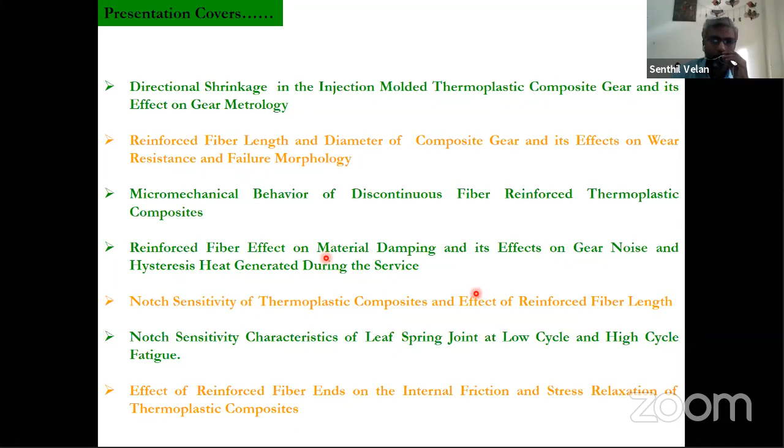The first topic is the directional shrinkage in the injection molded thermoplastic composite gear and its effect on gear metrology. We will go through this in detail in the slides. Then we'll cover reinforced fiber length and diameter of the composite and its effects, the micromechanical behavior, and the effect of fiber length on material damping and notch sensitivity of the material.

Then the leaf spring. In this presentation, I have just covered two things: one is the gear, and the other is the leaf spring. These are basically, if you remember, our major challenges, where the type of loading coming into these elements is very complex, and because of the geometry and shape, designers have more challenges when solving this type of gear or leaf spring problems. So we have just touched upon these two machine elements.

And issues like, whenever there is a discontinuity—because any machine element cannot be without some discontinuity, you may require to make joints, or you may require to make a hole—then how exactly will it behave? That is about notch sensitivity. So when there is a hole, how it will behave, and so on. These are some of the things we will discuss in detail, and you will understand more.

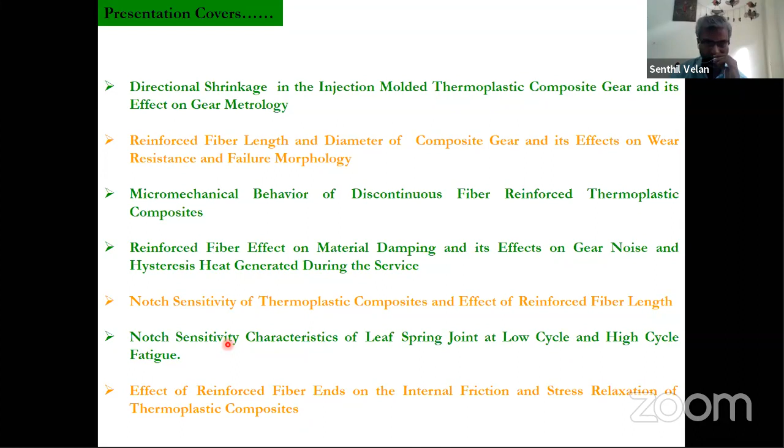The first part is the directional shrinkage in the gear. If you look at this, this is a mold, one type of mold. This is called a three pinpointed gate system. We have different types of gates—this is a pinpointed gate, and this is the cavity. This is a three plate mold system. This is a molded gear.

We have different types of gates, but say for example, let us arrive at this particular configuration or design of the gate. Then what are all the issues if you come into this? This gate location design can be done through some analytical or numerical technique, and this was done with a tool, a mold flow simulation software, a numerical technique. The whole idea is that you will be able to identify the best location.

What is the purpose? The purpose is basically that the pressure and temperature throughout the product should be similar. If you remember, we are talking about a temperature sensitive material, which is more sensitive to pressure and temperature. That means if you maintain a different pressure at a different location, you will end up getting a different shrinkage—the part size will be different at different locations. So we wanted to have uniform pressure and uniform temperature throughout.

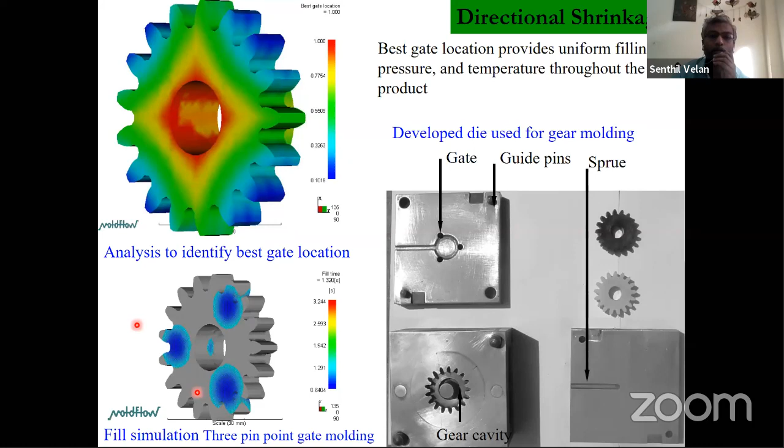So what exactly does this contribute? As we said, the part thickness and geometry is getting affected by this melt flow, including viscosity, because we know this is a viscous class of material. It is not like an elastic material, so it's viscoelastic. The heat transfer characteristics also matter, because depending on the temperature and pressure you maintain, the amount of heat you generate or dissipate will be different at different parts. So finally you end up getting a differential shrinkage.

So what is the challenge? This is about simple polymer, but when you add reinforced fibers, you can see the difference. This is unreinforced material, this is the reinforced material. This is a simulation, though I will show the actual shrinkage value also. You can see that broadly it reduces the shrinkage because what we have added is glass, which does not behave like a polymer. These are basically elastic material, so you will not have shrinkage unlike your base matrix.

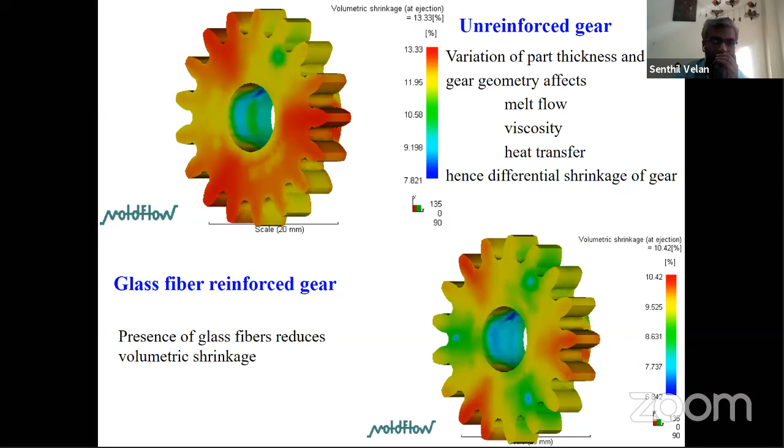If you look at that, the orientations - the fibers are discontinuous, so they are going to orient along the melt flow direction. Again, this is simulation; I'm going to show the actual picture also towards the end. If you look at that, the fibers are radially oriented - the glass fiber reduces shrinkage and fibers are oriented along the melt direction. The melt direction means this is your point of gate, and it is just flowing outward.

If you look at that, it is aligned with the ends of the profile. So that means if you measure the outside diameter or hub diameter, you are measuring in one phase along the fiber orientation, and you are measuring normal to that in another. So naturally you will understand that when you measure in this particular fashion versus this variation, you will have a big difference in shrinkage. Because if you look at the amount of material available, the amount of fiber presence here is different compared to this direction.

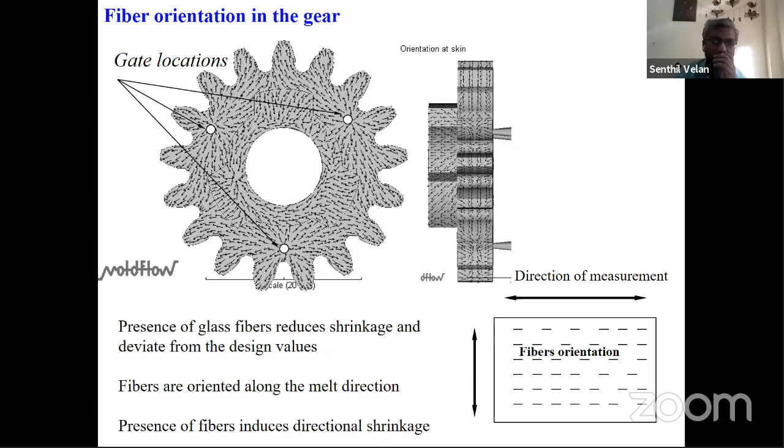This is really going to make a huge difference. This picture gives an idea about the two different things, particularly the tip circle or hub diameter. This is your hub portion, this is your tip circle diameter, where the fiber orientations are coinciding, whereas normal to the fiber orientation is nothing but your face width direction.

In addition, the bore diameter pin is going to prevent the shrinkage - this is internal core like material. So typically if you look into this, you will see the actual measurement versus the predicted one. The actual measurement, if you look at the hub diameter, for example, and face width, you will be able to see the difference.

So this is for one class of material, unreinforced material. The deviation is very large here, whereas the face width deviation is very very less. But when you add the fiber, it's exactly the same behavior but slightly lower - the deviation from the actual measurement is slightly reduced because of the presence of the fiber. Even without fiber, the polymer molecule orientation affects the geometry across different parts. But we know the hub face width is not very crucial - rather we will concentrate more on the gear tooth profile, which we will look into in the following slide.

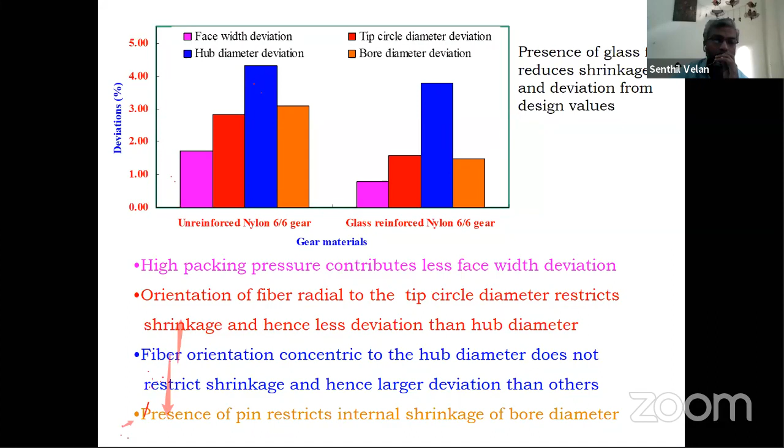This is not only due to the minimum thickness and issues. The warpage, we are all familiar with this warpage in casting. It is similar to that, but as far as injection molding is concerned, this is more related to the shrinkage deviation, when the shrinkage is not uniform, and this contributes.

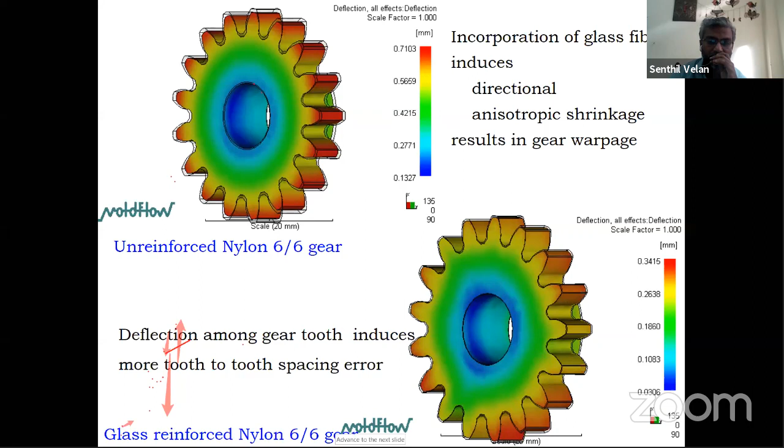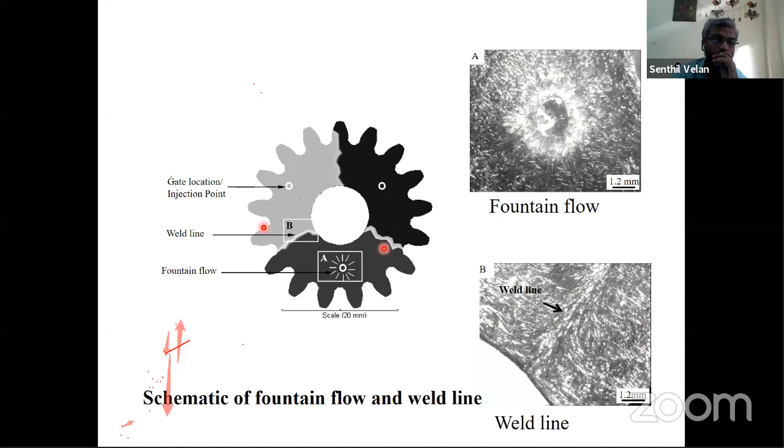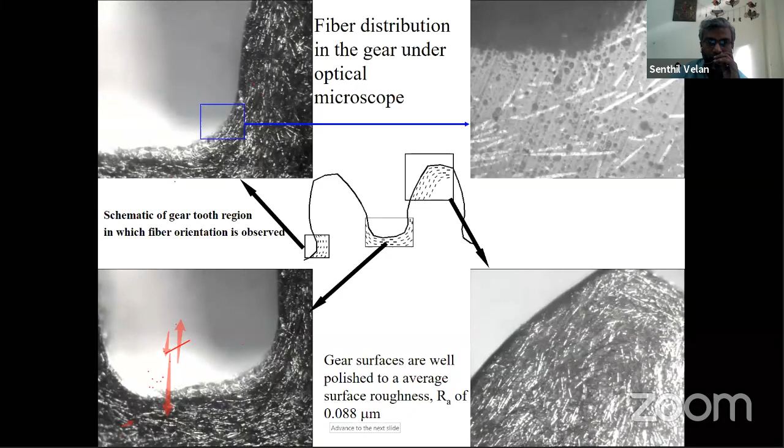More than that, what is more important is the final metrological aspects, and how this orientation is going to really contribute. This is one particular type of thing called gear tooth profile. And the gear tooth profile itself has many things: pitch deviation, profile, form deviation, and so on.

Here you can see we took three teeth at three different numbers - 1, 6, and 12 - and we moved from the base circle to the tip circle. Ideally it should be a straight line. It is an involute, but the variation we are trying to observe is basically the variation of the involute form deviation. Ideally it should be a straight line, but you can see how exactly it turns out.

This is unreinforced one, this is reinforced one, and you will be able to see that in the case of glass reinforced material, there is less amount of shrinkage, because ideally you expect a straight line. This is achieved here, but the problem is this is the total.

You will be able to get two different things: one is called total profile, as well as form deviation. Form deviation is nothing but you have some mean line, and within the mean line you have some variation. But here, within the mean line, you don't have much form deviation. So in unreinforced material, the form deviation is not so much, but the total deviation is larger.

So typically when you design the gear, it depends on what type of deviation you can tolerate; accordingly we must be able to see that. Not only that, we have other types of metrological deviation which are also to be considered carefully.

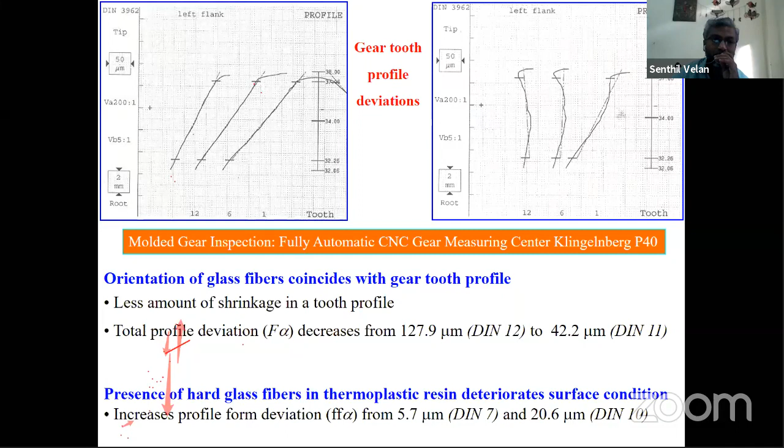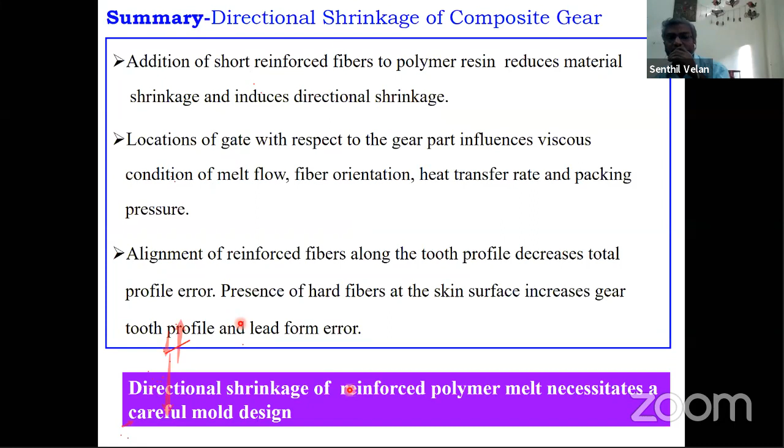In the next topic, we have just covered one topic — we have to be careful about the directional shrinkage. Now we will discuss more about the fatigue and friction wear behavior of these developed gears.

This was a test facility used to conduct some experiments, and I will not go into detail. This is just a drive motor, and this is a driven system, a dynamometer-like setup. These are some of the sensors used to measure torque, temperature, acceleration, noise, and such things. We will not go into the detail.

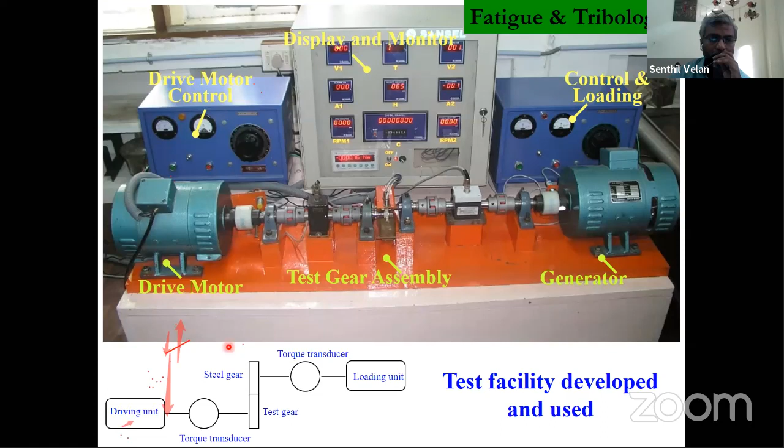If you look into this, these are some fractured surfaces. Again, we have used a different class of material, but I am only going to cover what is required. Broadly, we have used three classes of material in this topic: glass reinforced and carbon reinforced. Within the glass reinforced, we have nylon 6 and nylon 6,6. We have used these for different objectives, but finally we end up getting different sorts of results. If you look into this fractured surface, there is not much fiber getting separated.

Pullouts are not much happening, though you are able to see some fiber extruded and all. Not much pullout, not much hole you are able to see. Sufficiently, the fiber and matrix are in bond with each other. Good adhesion - this is separated fiber. Good adhesion is happening, so naturally you will see better wear performance, resistance, and so on.

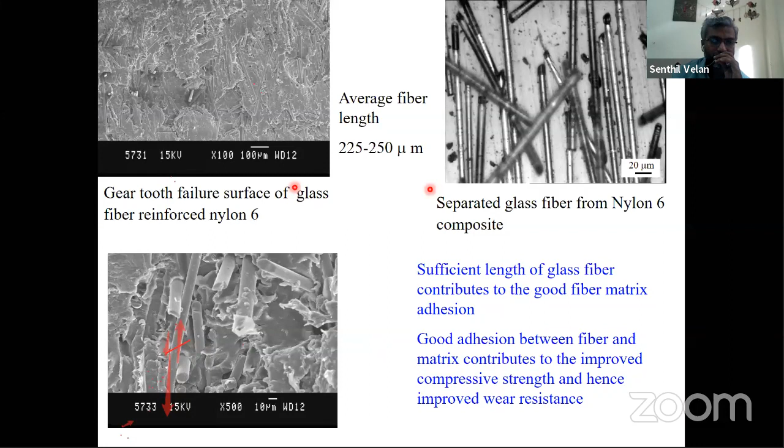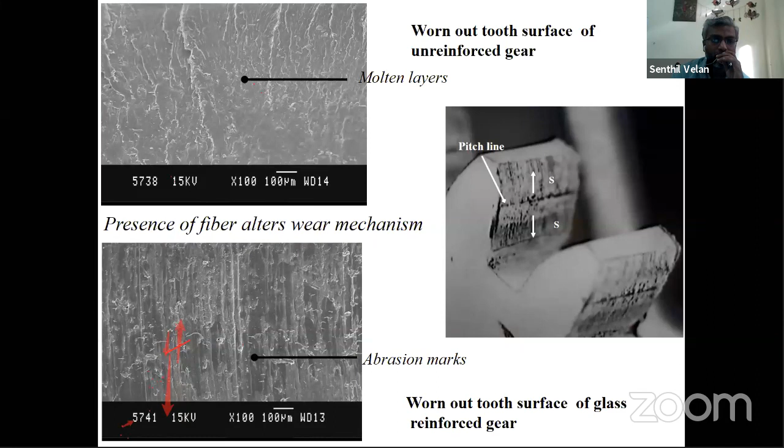But in the typical worn out surface also, you will see how the wear marks are observed from the pitch surface and so on. What is surprising, if you look into this to compare the wear particles between the glass reinforced and unreinforced material, you can see a big difference between the glass reinforced and these two unreinforced materials. So at higher loads, basically at higher contact stress, because we are all familiar with the Hertzian stress.

Contact stress related - particularly the gear is subjected to both bending and contact stress. So we have to bother about both bending strength and contact strength. Naturally, if you want to prevent wear, or rather if you want a better tribological property, you need to work more on contact. If you are really bothered about the bending thing, you have to bother about the root stress and so on.

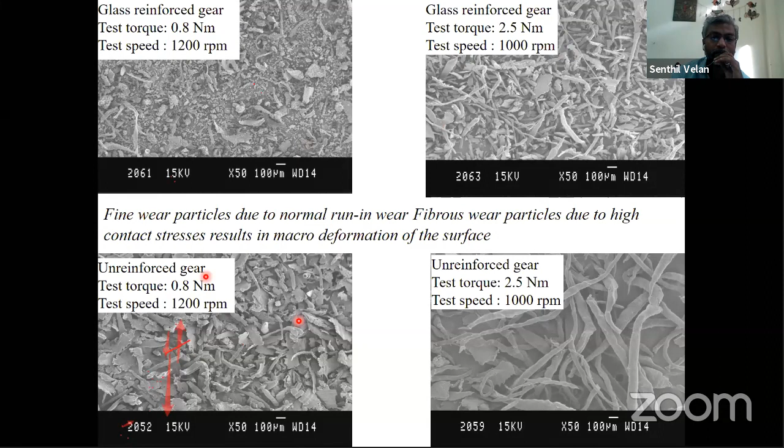And regarding the bending aspects, again there was a lot of other work done, like the effect of speed. We normally see that in the case of metal gear, the speed does not make any difference - we never bothered about the effect of speed and all, except the PV criteria, we don't really give much importance. But the gear, being a viscoelastic material, we need to work more on that. I have not covered this particular aspect.

I am just giving one small fact before we move on further. Normally we expect that when you run it at higher speed, the wear will be more, but it happens opposite in the case of polymer class of material. That means if you run it at higher speed, it will perform better, because the contact time will be relatively less. And when the contact time - the rate at which you move or slide - is faster, the material will behave in a better way.

Because its strain related issues are also there, and contact time - these two contribute. So when you look into the bending behavior, as we said, both bending and contact - this is about the bending one. As expected, the fibers will act as a bridge between the cracked fibers, and whether it is unreinforced or glass reinforced or carbon reinforced, you will always see that this is going to restrict our crack growth and so on. So it is always going to be helpful. There is not much issue over there.

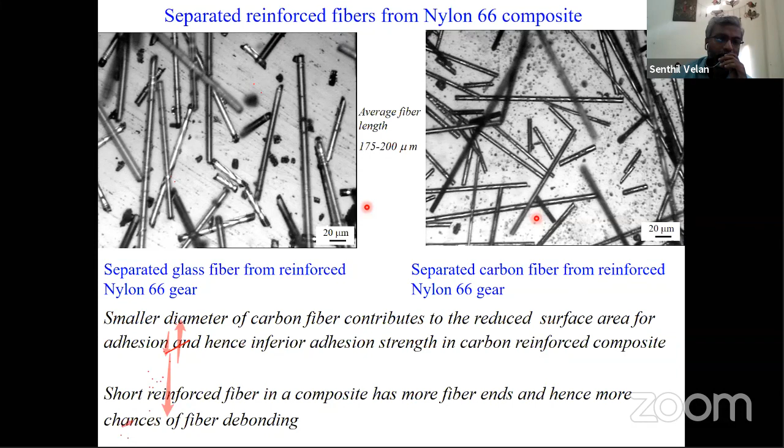So this is what is finally reflected. If you look into this, this is about another class of material where we have used a 6-6 material. Again, we expected the 6-6 material will be better than 6 material, because this is a different polymerization. It is expected that nylon 6-6 will always be better than nylon 6 material.

But surprisingly, when we make use of a different glass material, you can see more pull out. You can see a large amount of holes over here. So it is not because of the 6-6 and all. In fact, 6-6 is better than 6 material, but this one has got a reduced fiber length, and that is going to contribute to these issues.

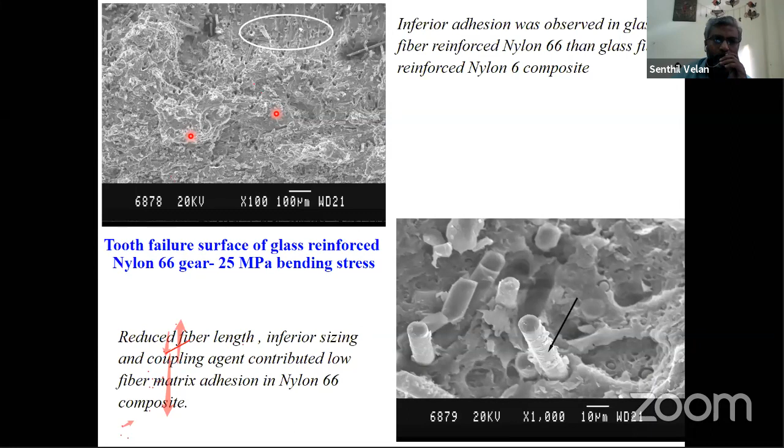And carbon, this is about carbon. You can see that huge pull out. You can see a large amount of black holes and so on. You can also see the pull outs over here.

Typically, the surface energy of a typical carbon fiber, though it was not measured, the surface energy is the one which decides the wetting capability and how far you are able to join this material with another matrix. Though individually it is a better class of material, unless you take care to improve the surface energy and the issues about diameter and length, you will end up getting a poor material. In fact, that is what happened — it showed a very poor performance.

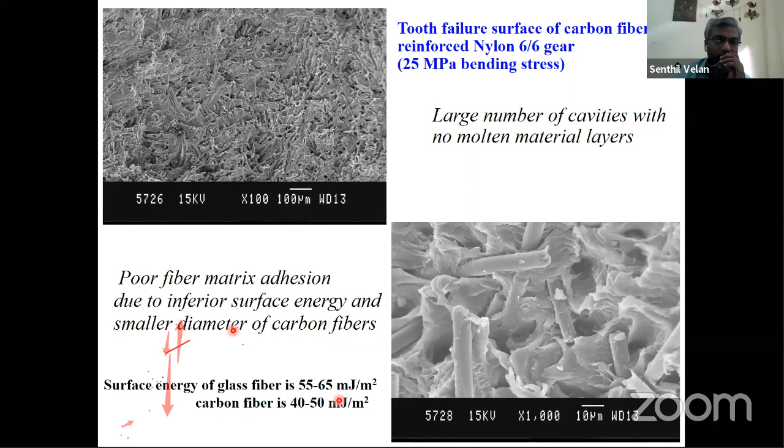So if you look at that, this also gives an idea about the wear particles. You must have seen the debris particle in the earlier slides for 6 material, whereas for the 6-6 material, you can see that the debris are larger in size — both in carbon and the 6-6 glass reinforced material. Even at lower load contact condition, you can see that wear debris particle, meaning you have to even limit your contact load a little earlier than that.

So yes, it was showing the carbon reinforced gears were having a better bending static strength. Though I have not presented that slide, as far as the contact condition is concerned, it was showing no bad one — it showed no crack, and it takes more time to develop, to form, and to grow. That is sure, but it is a contact part. If you look into this, the surface is getting worn out very quickly and so on.

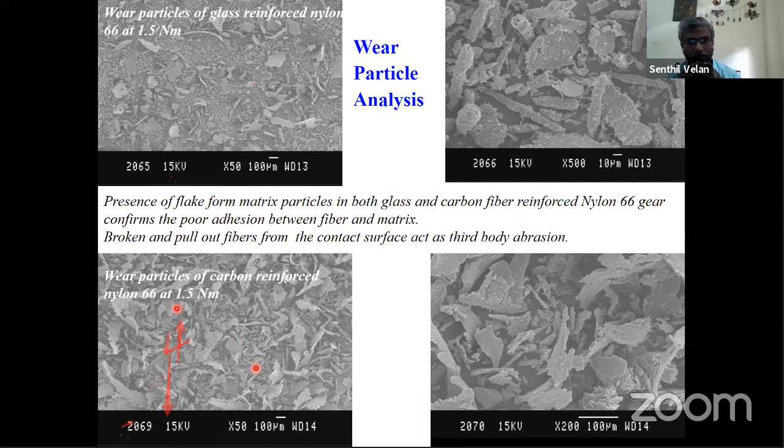This is the summary where we wanted to present. So in tribology and fatigue, it is not just by adding some reinforced material that you will end up getting a better product. It is not so — we have to be more and more careful, particularly for tribology applications. Then we have to bother about the surface energy, the fiber diameter, fiber length, and number of ends.

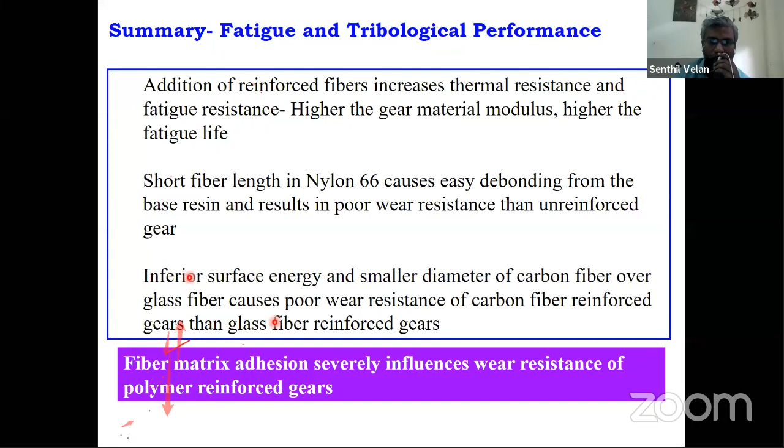Everything matters, so this is what we have to be careful about in choosing the appropriate material for our application. In the next few slides, I will again touch on the same point but with some other supports. We have done some analytical and numerical work to understand the effect of fiber ends and fiber surface. Typically, a unit cell was modeled, and then we tried to see how this micromechanical model is getting affected regarding stress transfer between those things.

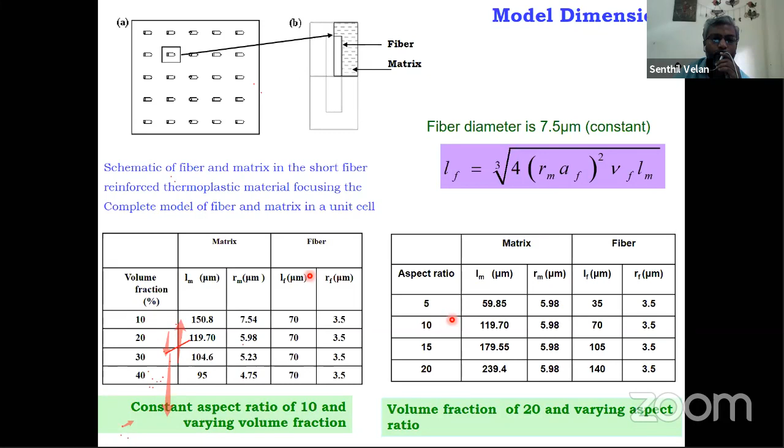This is not in the paper — this is just some numerical work we have done to prove that at various volume fractions with different length and diameter, maintaining different ratios, we were trying to understand what is the critical fiber and critical fiber length. That was our objective. If you look into this, different conditions were taken, and we were trying to understand how the interface is going to affect things.

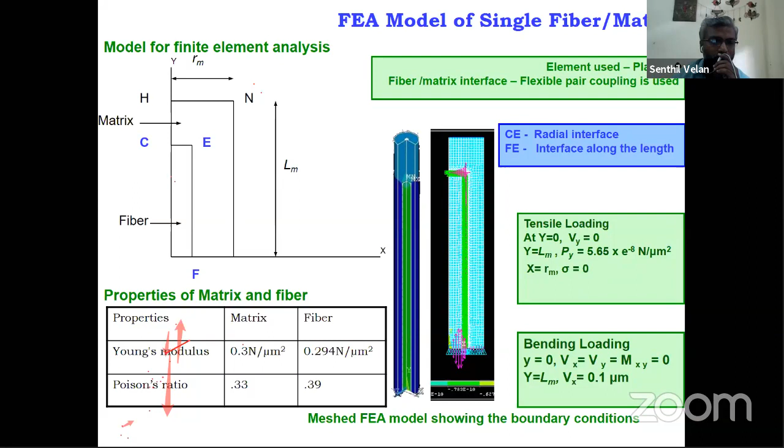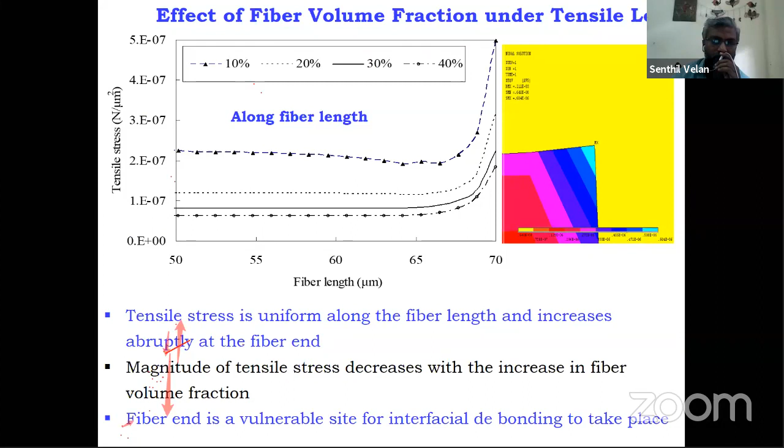So there you can see at the fiber end, the huge transfer of load happening over there, whether it is a tensile load, a bending load, or whatever type of load. If you look into this, you have to really bother about this critical length. Beyond a particular critical length, it is not going to make any difference.

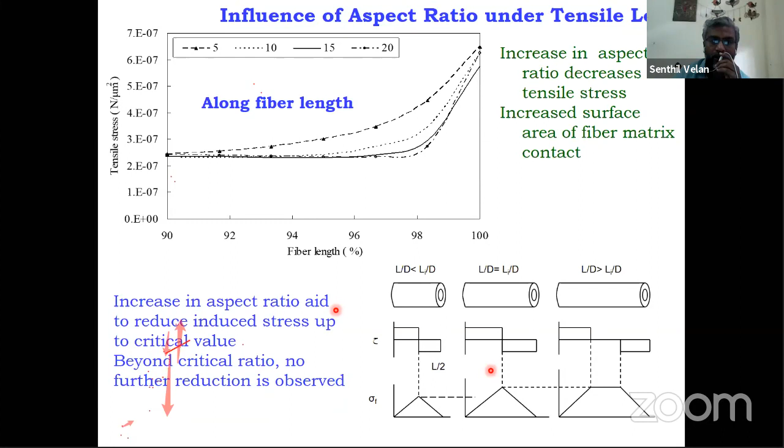But you have to choose your appropriate material, so that you make use of material where a critical length and critical diameter is considered. For that purpose only we have kept this slide. And not only that, the fiber fillet radius is also going to make a huge difference.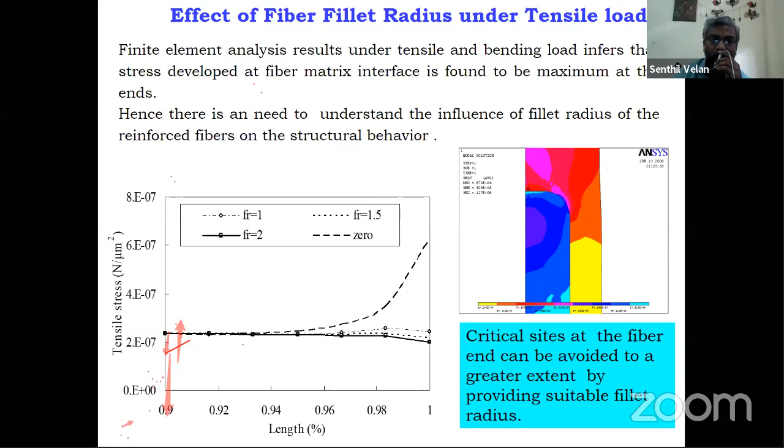So how can this be done? Whether people manufacture with a single material, or add the material, this is done through processes like extrusion, pultrusion, and so on, as I said in the very first slide. That is going to decide the type of end you have. So always, as expected, sharp edges are not at all preferable. Analytically or numerically also you can prove how this is going to affect our ends and so on.

This was the slide where we identified how this interface is very crucial for us. So when we wanted to design some elements, it can be a gear or any class of material, we have to give more importance to the type of fiber. It is not just glass or carbon or Kevlar. We have to give more importance to even the size of the fiber, and the aspect ratio, the fiber ends. If the fiber length is shorter, you will have more fiber ends, and we have some slide that shows how that is going to affect the other performance as well.

So with this, we move on to the other topic, which is the damping aspects. Many of these machine elements, basically we want to have a quite noiseless operation, and that is decided by this damping property. So it should absorb the noise, shocks and vibration, everything.

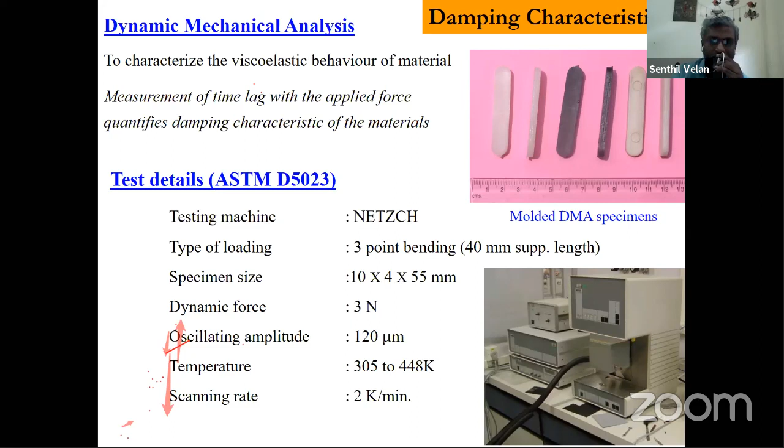This is a typical standard technique called dynamic mechanical analysis, specifically meant for this viscous class of material where you have viscoelastic issues. This is done based on standard testing. So unlike our normal class of elastic modulus, we will bother about the storage modulus, loss modulus, and then the damping ratio.

We expect that higher the damping factor, or damping ratio, the material is good for your damping application, like in the gear and leaf spring. People expect that it should absorb the shocks and vibration. So though you add glass and carbon for your fatigue and tribological aspects, it comes at the cost of your damping. It's very obvious, when you add the elastic material, the damping property, that is the ability to absorb shocks and vibration and noise, is getting disturbed.

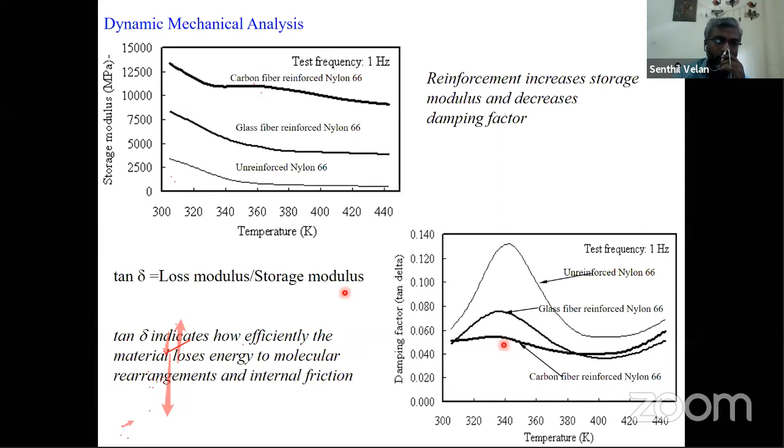Noise is getting more not just because of the material, it will also come with metrological aspects. The tooth spacing error we discussed earlier is also getting altered or deteriorated, and that will also create more noise. So this is about noise generation.

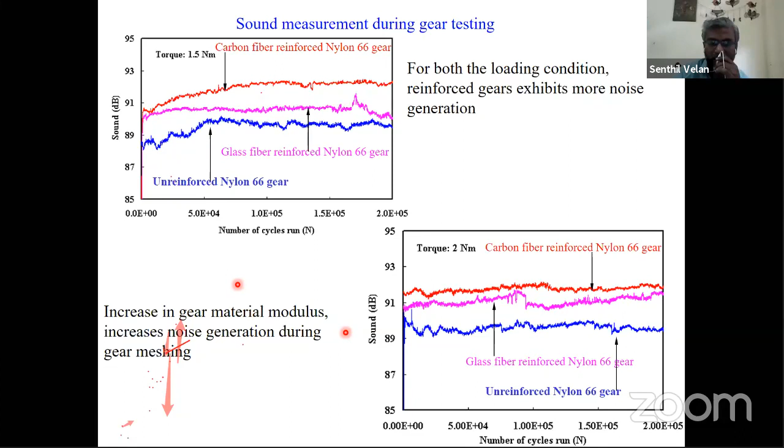To understand more about hysteresis, we are all familiar with material hysteresis. That means you do this loading and unloading and try to see whether the material follows the same path. If it takes a different path, then you say this is hysteresis, and some amount of energy is getting lost through that. So a test rig was developed in-house, and we tried to see how hysteresis is occurring under the gear.

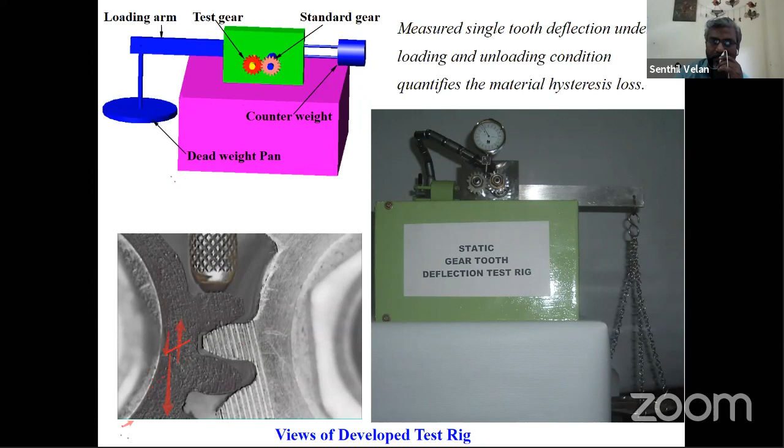This indirectly gives the amount of heat generation due to material hysteresis, because you are subjecting this material to fatigue load, cyclic load. So because of the cyclic load, you end up getting heat generation. Naturally, when there is internal heat generation, it's because of molecular collision, particularly the polymer molecule and polymer with fiber material colliding with each other, and that generates internal heat. Being a polymer, a heat sensitive material, this is going to soften the material and weaken it mechanically.

So we have to concentrate on maintaining this hysteresis under well controlled conditions. For that purpose, we have done this particular exercise.

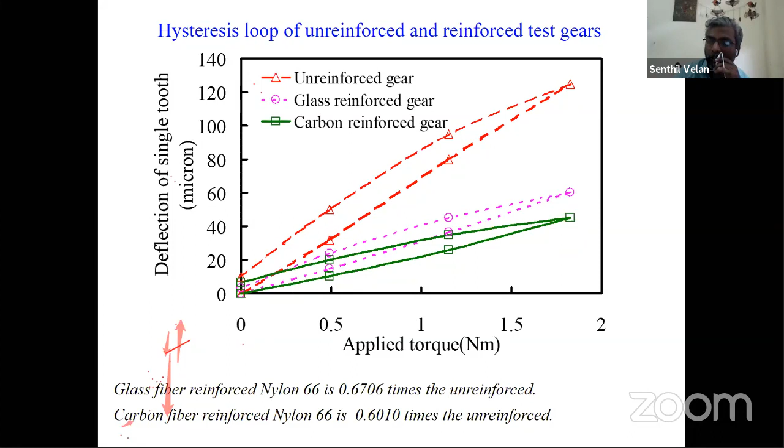When you add the fiber, naturally this loop size gets smaller and smaller. You will be able to see that in that way, the internal heat generation will not be more when you add the fiber. In that particular aspect, this is better.

Another aspect is the metrology, because the noise is not only because of the material aspect, but also the geometrical aspects. The error, the worst pitch error, which contributes to the noise, is basically the worst error between gear teeth - like between 1 and 2, 1 and 3, 1 and 4. There are cumulative pitch errors, and again you identify the worst pitch error out of this.

What is the worst pitch error? There, if you look at that, the reinforced one has a higher error when compared to the unreinforced one. So it is not only the material aspect, but geometrically also it is poorer, and because of that you will end up getting a larger dynamic load and so on.

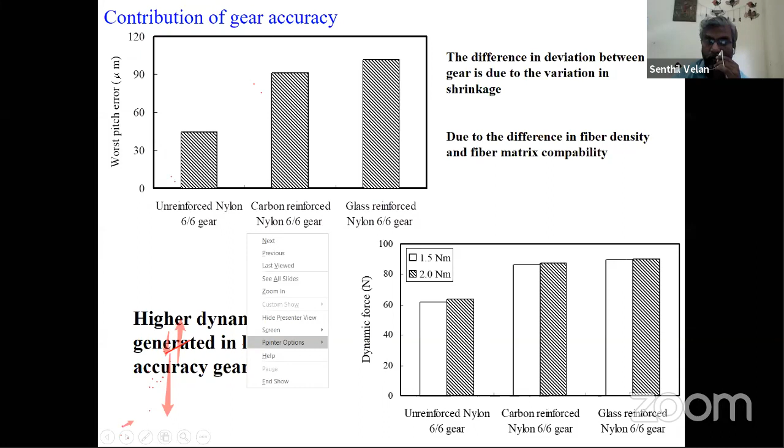These are theoretically calculated, not exactly measured, but these are the measured ones - the pitch error and all is basically measured, whereas these were theoretically computed and so on.

So in the damping, we wanted to give some sort of summary. When you add the reinforcement, naturally it will increase the modulus, particularly the storage modulus, thereby the damping factor is reducing. Damping factor reduces and gear accuracy induces more noise generation, and addition of reinforcement decreases the amount of hysteresis and hence its surface temperature. So damping characteristics influence the gear performance.

So any machine element is subjected to contact and so on, so the ability to absorb shocks, vibration, and noise is also very crucial. In a way, we were all thinking that when you use a polymer class of material, it will be better, but when you add the fiber, it gets more complicated. That is what we need to understand from this.

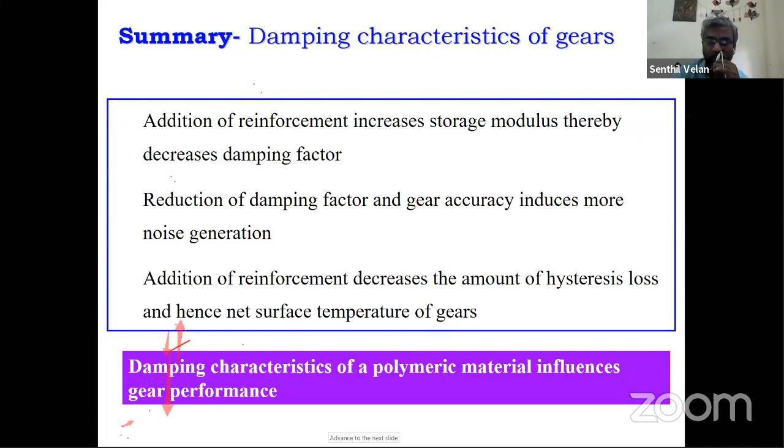The next topic I wanted to cover is about damage, which is the fracture mechanics aspect. Again, we started with some simple specimen level understanding, then we moved on to the part, particularly the leaf spring application. This was a standard tensile specimen with different diameter holes, and then we did some tensile tests.

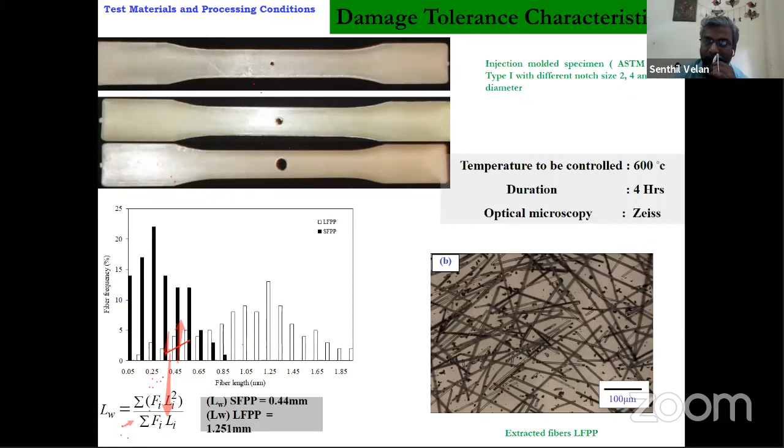We took two classes of material - one is short fiber and the other is long fiber - under three classes of material. In the very first slide, I gave examples of short fiber and long fiber. The fibers are random within the short fiber, whereas the fibers are well aligned in the case of long fiber. So in those cases, you will be able to see what is really happening to the notched and unnotched specimens. We are trying to understand notch sensitivity, so what you do is perform tensile and other basic tests with a hole and without a hole.

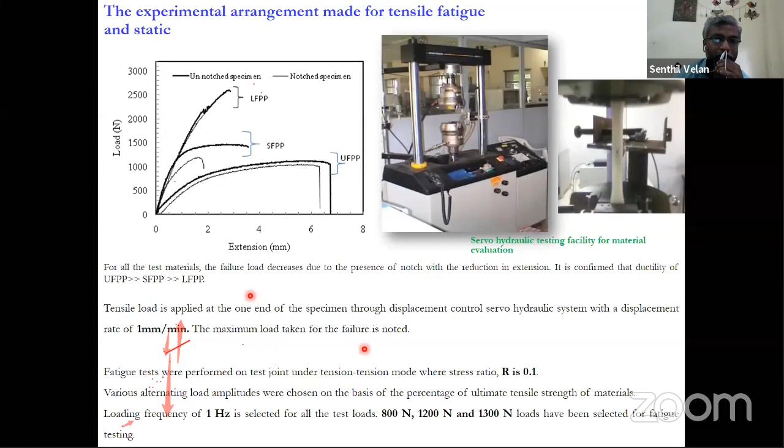It's not just about the load coming in, because without the hole you'd have to reduce the diameter in that cross-sectional area, and then try to understand the strengthening or weakening effect. So we have also done some fatigue load testing. You will be able to see the fracture strength - if you look into this, under this class of material, which is a long fiber one, you will see a drop.

Whereas both the unreinforced and short fiber material - here we used a different class of material, polypropylene. In earlier studies we used polyamide, a nylon-based material. So here, when the notch diameter is increased from 2 to 4 to 6, you can see there is an increase. It doesn't mean your strength is getting increased. As mentioned, you have to subtract the diameter of the hole - the net strength - and whatever area is available for resistance, only that you consider. So with that, you'll see a slight increase. This we call the strengthening aspect, and this is the weakening aspect. This is how we try to understand notch sensitivity - the net area is considered for strength capability by subtracting the notch area. So we need to really consider this notch sensitivity.

That means when there is discontinuity, like a hole in your material, it doesn't always deteriorate performance - sometimes it will help. This happens when the material has sufficient viscous component. When the viscous component is relatively less, it's not going to help. If you look at this long fiber reinforced one, it deteriorates with a larger diameter, whereas this one shows improvement.

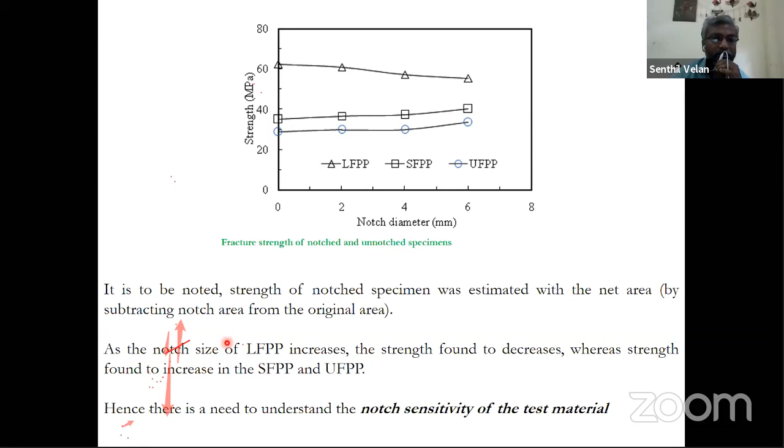The fatigue aspect - we're all familiar with notch sensitivity, Kf, Kt. You can clearly see these two are dropping. This notch sensitivity in the unreinforced and short fiber cases is dropping down, whereas this one is increasing. We call this a strengthening effect. Why does strengthening happen? Because this material has the ability to undergo localized yielding near the hole, whereas that possibility doesn't happen in the case of brittle or high strength class materials.

So this was done even at the specimen level - you can see near the hole, near the notch, what is really happening to the fibers. You can observe the fiber bending issues, the notching issues.

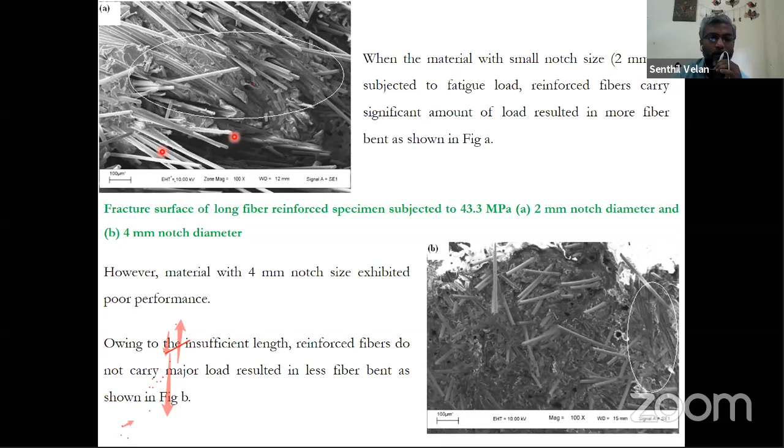Now we wanted to understand how this gets reflected in the machine element part. Particularly we took a class of leaf spring - this is another work where it's a mono leaf spring. We're familiar with the graduated leaf spring with many smaller leaves of shorter length than the master leaf spring. But this is a single one, and you want similar performance - you can see the middle has a larger width, the way in our graduated leaf spring we put a smaller one, then keep increasing, so as to have normalized bending stress with different lengths of leaves - longer, shorter, and so on - so the middle takes more load to have normalized bending stress. The same thing is kept here with a larger width in the middle. This single leaf spring achieves similar performance to what people achieve with the graduated leaf spring. We won't go into detail on other aspects like gating location.

Again we took two different classes of material - unreinforced and glass reinforced polypropylene. We will concentrate on the notch aspect. Finally, these fibers - this leaf spring is to be joined with your machine structure, like your chassis and such things.

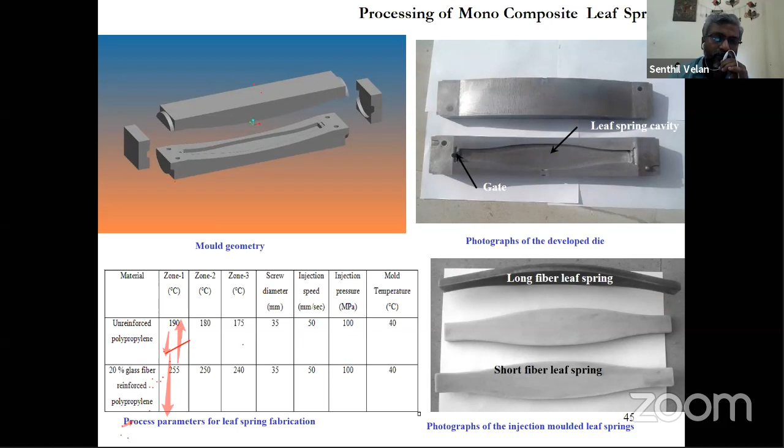So how are we going to join? Again, by making holes, fasteners and all. In those cases, you have to make a hole. So now the issue is, when you make the hole, how is it behaving? Because your leaf spring is not just based on that - the joint behavior is also something we have to consider. That is why we said how notch sensitivity, particularly with reinforced material, is going to affect it. That is why we saw the specimen, the behavior and all. This is how typically people carried out this joint strength behavior testing.

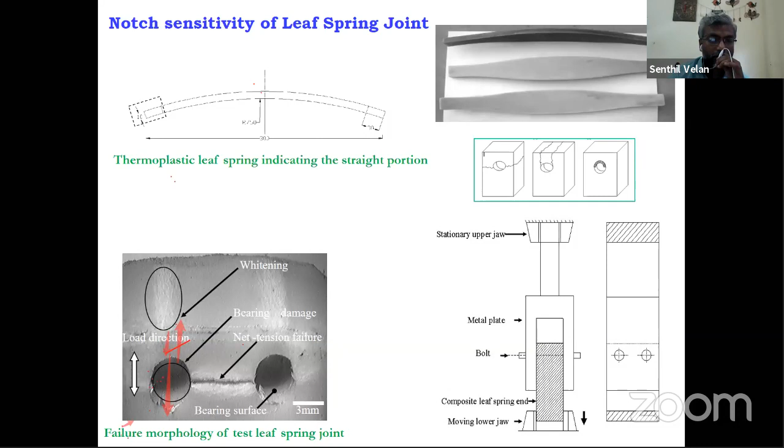If you look into this, different diameters of holes were tested, and different types of fatigue loads were given. We observed different types of failure between this and here - bearing failure, shear failure, and all those failures under different loading conditions.

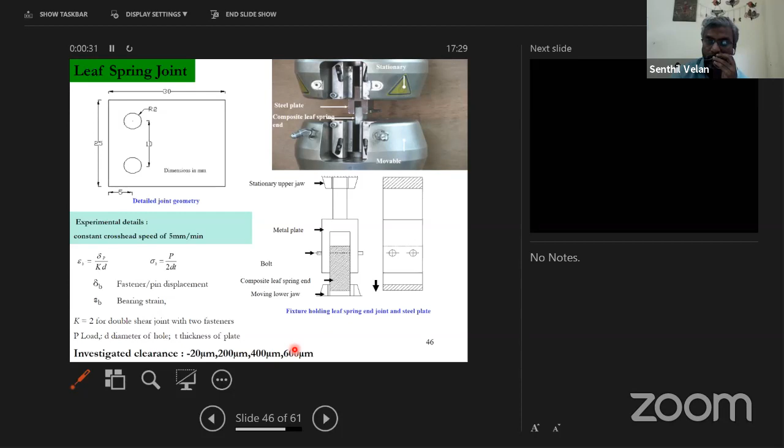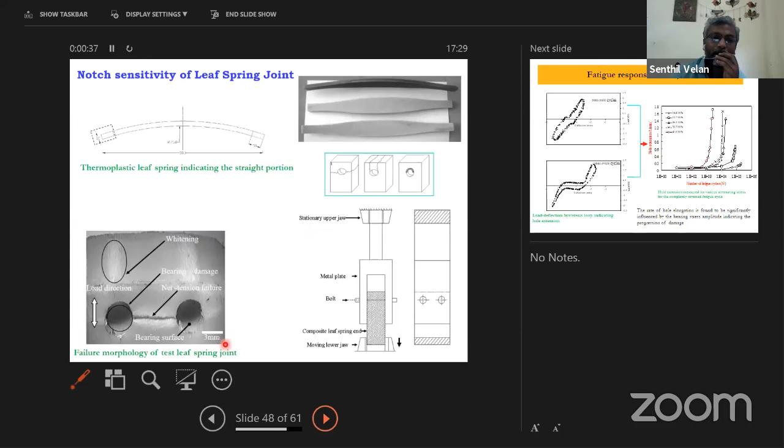So this is what we have done for various diameters of the holes. We have also considered the clearances, because what type of clearances you are giving, in microns, between the pin and the hole - that is also going to make a huge difference in the fatigue behavior. That was our objective. We have shown how the loop is getting enlarged, and also we were able to see at different clearances how that is getting affected.

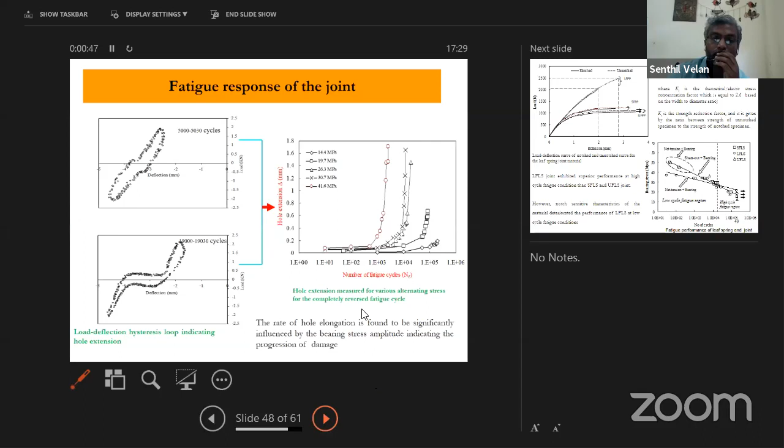So this was the slide we were trying to finally achieve. If you look at that, the notch sensitivity, because of the different - we have considered three classes of material, and how the notch sensitivity is getting varied. We were trying to understand this from this exercise.

In this particular portion, you will be able to see this is the final bearing strength, between low cycle and high cycle - we are familiar with low cycle and high cycle fatigue. Any machine element subjected to fatigue requires a different criteria or design approach or strategy, because this behavior will be completely different under 10 power 4 and beyond 10 power 4. So the similar thing we were able to see here under low cycle fatigue behavior.

This long fiber reinforced material shows superior performance in the high cycle case, whereas in the low cycle case the unreinforced material and short fiber material show even better performance. Again, it all depends on the notch sensitivity and localized plastic yielding. That was the reason we have seen at our specimen level itself - why this particular behavior we have seen at the specimen level. Now the same thing we are confirming at the component level or the machine element level.

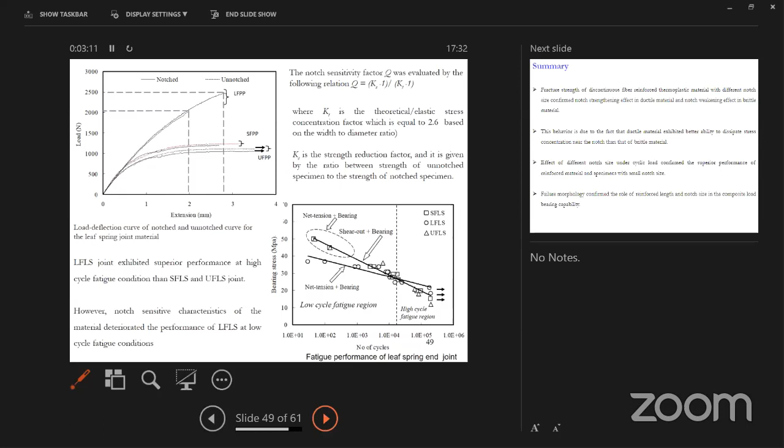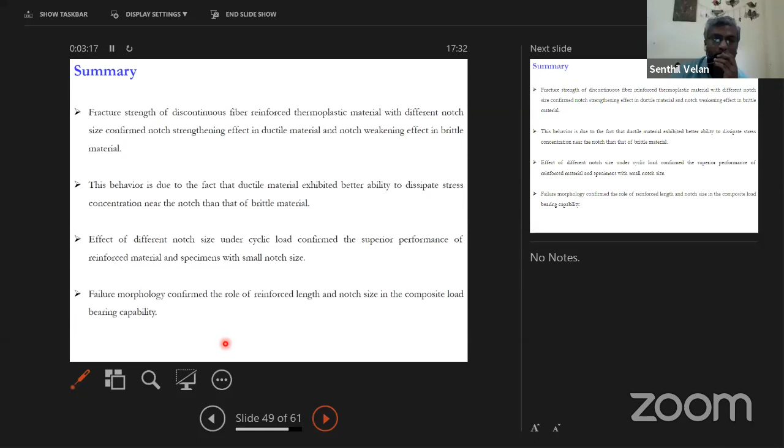So this was a summary - we have to really be bothered about the fracture strength of this type of material, because it is not that you will always have a continuous material. You will always have some discontinuity. So the fracture mechanics aspect is really to be looked into. Particularly, we have considered only one particular aspect, the notch sensitivity. There are many other aspects.

Depends on the component and types of load. You will really be bothered about different loading conditions, which is what we have simply bothered about, the notch issues and how that is to be taken care of or seen. That is what we wanted to conclude with this.

This slide will give more insight about the fiber end issue. If you remember, we said it is not just that a short fiber is inferior because of the length, you will have more fiber ends. So to prove that, we took specimen level experimental study. If you look at those two pictures, you will see this is short and this is long. For the same amount of volume fraction, you will have more fiber ends because this is short fiber. That is going to contribute to the damping as well as the heating issues, the dissipation. That is what we wanted to confirm.

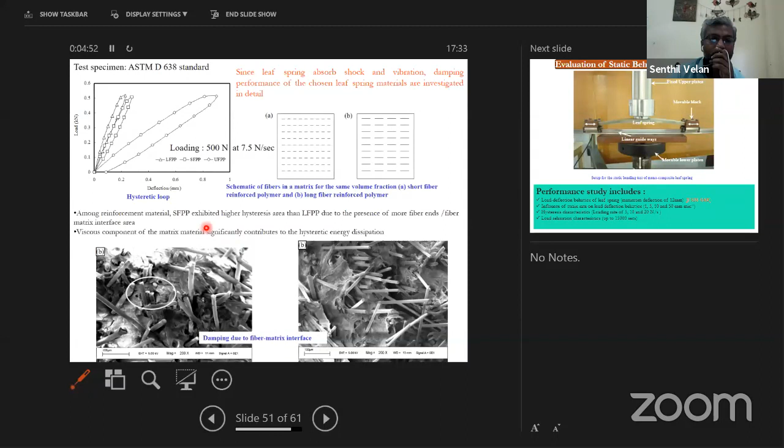So this will have higher hysteresis area. So again, we did this hysteresis experimentally. When compared to the long fiber one, the short fiber one will have higher hysteresis because you have more fiber ends and so on.

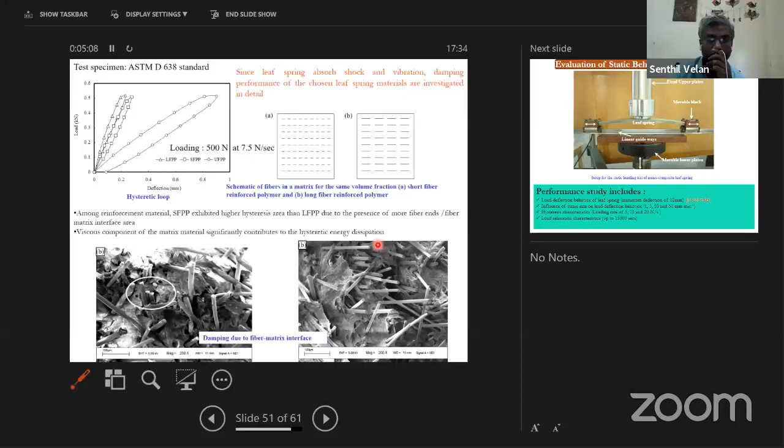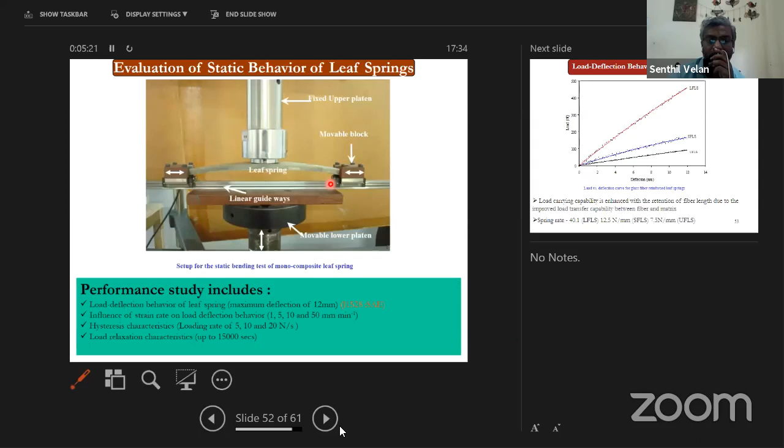This was the one I mentioned, where we made a specific test rig where a simple compression load is going to contribute the bending one. These are some testing conditions. This is a simple load carrying deflection behavior, and these are the loading and unloading behavior, and this is a hysteresis. The one we saw earlier was specimen level; this is the component level, particularly the leaf spring, where we were trying to get the hysteresis issues.

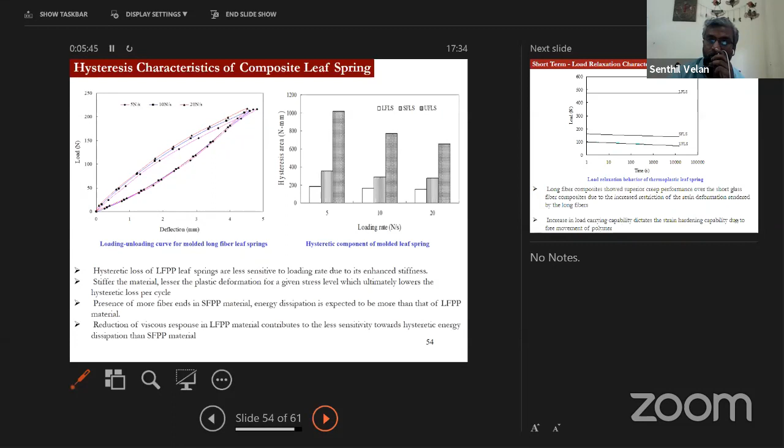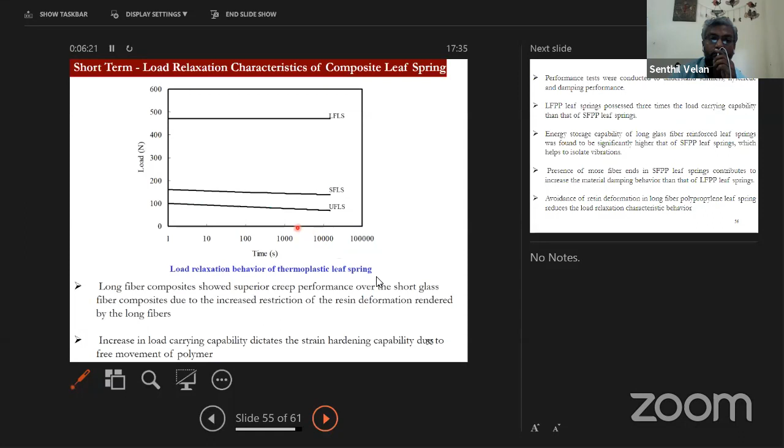Comfortable? Yes, yes. Taking time for the slide change.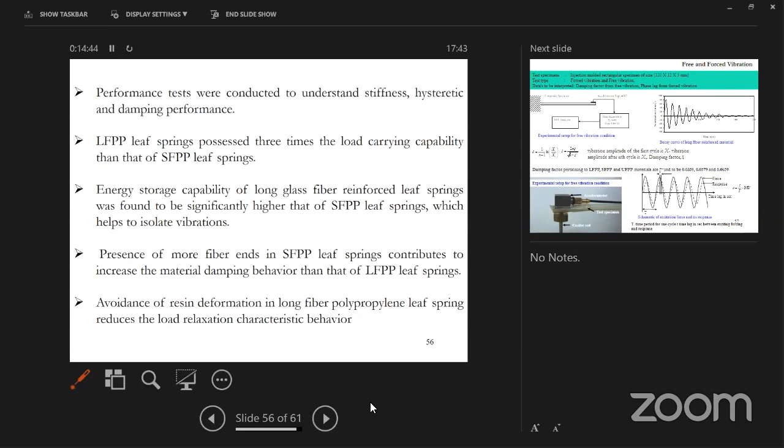Fine, I think you can continue your session. Yes sir, fine. So this was the thing which we were covering up, and then we will move on further.

We wanted to consider the damping aspects in this particular thing. We got some experimental results from the forced and free vibration of this class of material, showing how the response will help us in understanding the damping behavior.

So there were some accelerometers, some exciters, and we were able to pick up the acceleration, and then we were able to see the decay pattern and get the response between the lag between this load and displacement. That will also give an idea about the material's dynamic characteristics for this class of material.

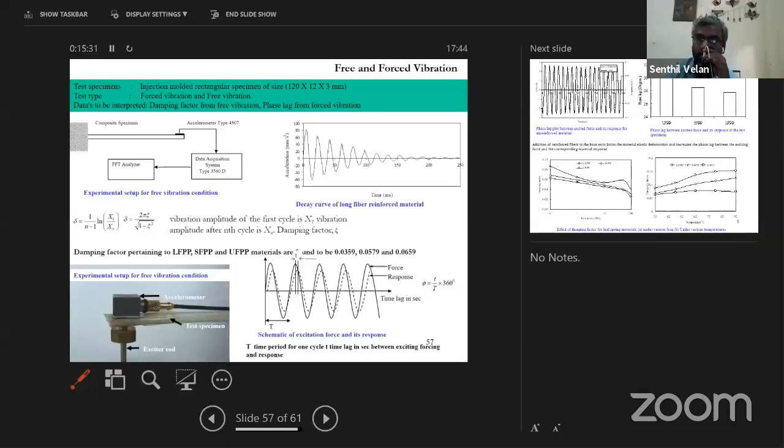So there is always a phase lag between this force and response, particularly for a material like polymer, where the viscous component will always cause some delay. In fact, though I have not presented this in this particular work, there will be a delay when you mate a polymer with a steel gear, because steel is an elastic material, and polymer is viscoelastic. So if you rotate the steel gear by 2 degrees, the polymer will not rotate by 2 degrees. It will rotate only 1 degree 30 minutes or something. This is called rotational delay, and this rotational delay will cause operational interference and so on.

But what we are talking about here is the phase lag. That is, there will be a lag between the force and the response. You will not immediately get the response, so there will be a lag. How that is going to affect things is what we have listed over here.

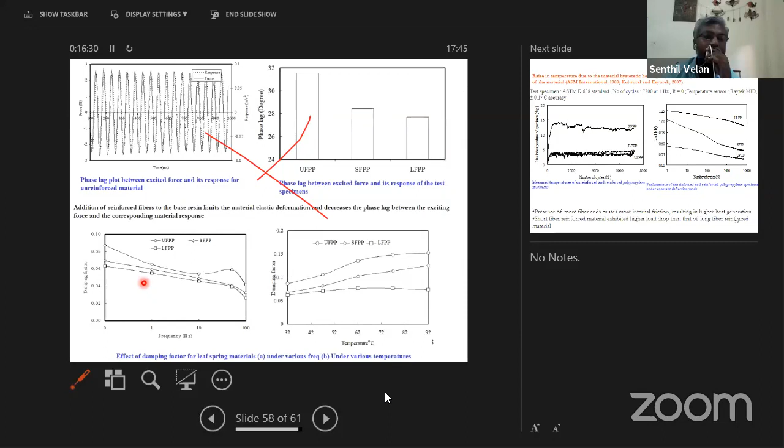I think we are towards the end. So basically, when you design a material for a damping application, particularly leaf spring, we want to absorb shocks and vibration. The whole functional aspect is basically to absorb shocks and vibration, the strain energy, and all. We need to really think that just by having some reinforced material, you will not necessarily end up getting better fatigue strength. We should not conclude that, because we are basically altering the dynamic mechanical characterization, and we have to remember those aspects.

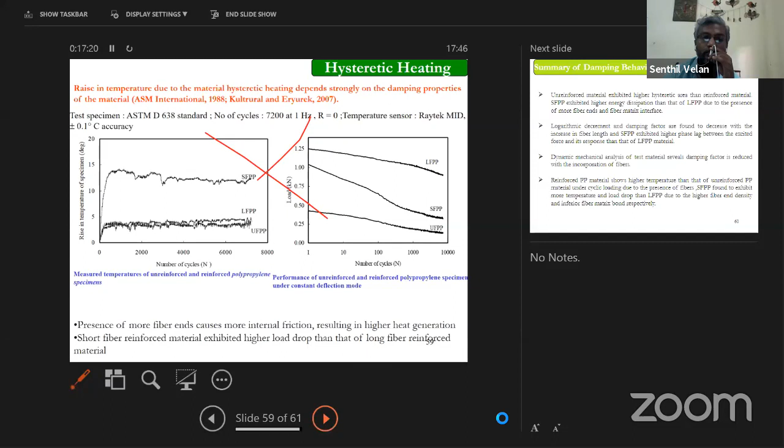Senthil sir, yes, yes, finish now sir. Yes, we are towards the end. I think we have only 2 more slides.

We have shown analytically, with some FEA results also, that a fiber sharp edge means it is always, as a mechanical engineer, we know the stress concentration issues. It will be more weak, more weaker in that particular region if it is a sharp edge. So we don't want a sharp edge, we want a rounded sort of edge. Like in any design, we prefer the edges not to be sharp.

But here, what is important is the interface. The interface will be very weak. Already around the fiber and matrix it will be very weak, and the end is very crucial. So if it is a sharp edge, it will still perform poorly.

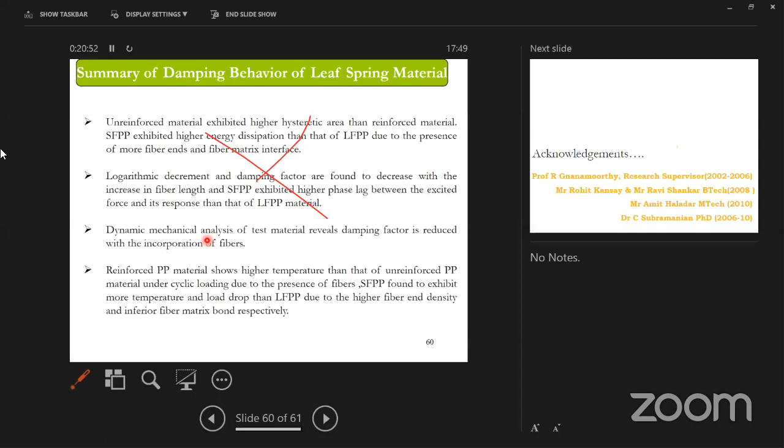And last question from my side regarding enhancing the damping performance. What are the recent approaches we can adopt to enhance such property, because a very high compaction in the running of the gear is required? What are the recent research aspects going on there? I'm not getting the damping aspects—how to improve it in the gear system?

Material damping, yes. There are many aspects; one aspect only we are just covering. By having reinforced material and using the proper coupler, which we have not touched—we have just talked about the fiber and matrix, but there is always a coupler, a coupling agent. What type of coupling agent you are using matters.

In addition, many people are using appropriate design changes to improve performance. As far as the gearing system is concerned, people use different materials at different regions—something I have not presented here. People use a softer material in the interior portion and a tougher or harder material at the exterior surface, so that when contact happens, they get a hard surface, but the internal core remains a soft material. This is like a duplex sort of material.

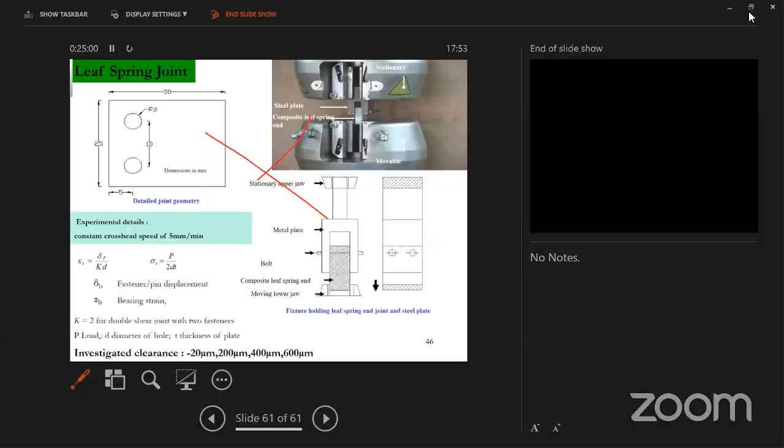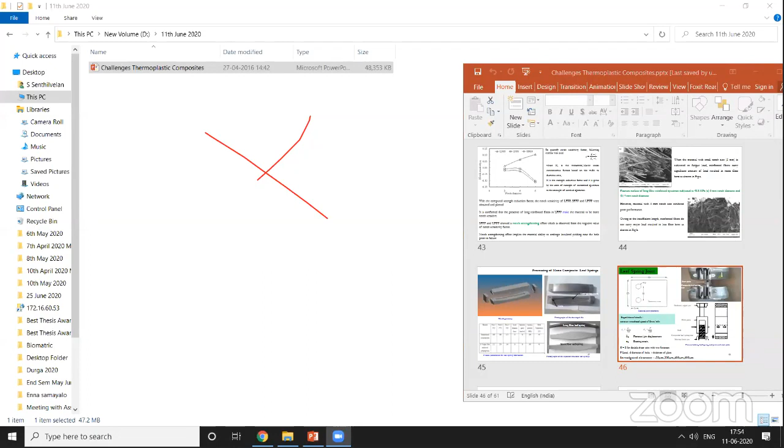Professor Senthilvelan, sir—yes. So I hope I can leave now? Yes sir, we can wait; the process will take a few more minutes to complete from the participants' end. Okay, thank you. Thank you, thank you.